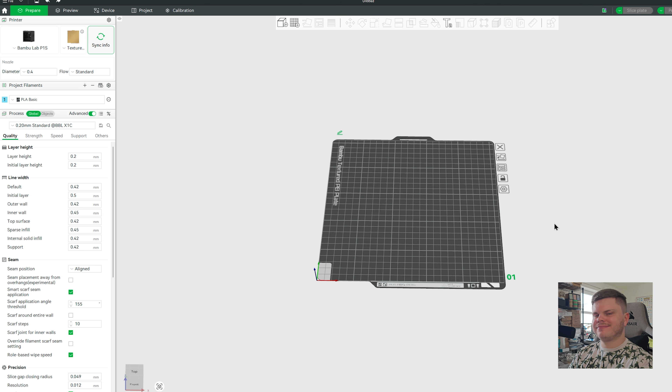Once you're in your slicer, in my case I'm using Bambu Studio, and you've found a model you want to modify. In this case, I've got this cute little egg model, which I actually made myself. But as you can see, it's just a solid model right now, nothing interesting about it. We might want to turn it into a keychain, for example.

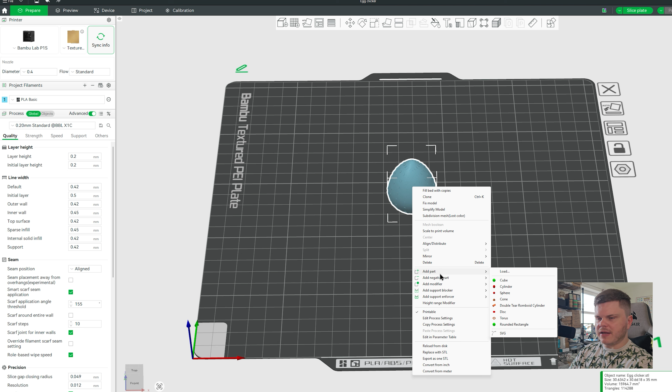So in order to add both positive and negative parts, with the model highlighted, you right click. You can see options here for add parts and negative parts. The same shapes are available, so you can add a cube, a cylinder, or a sphere. However, for this purpose, if you want to add a keychain hole, the best option is a torus shape.

If you add a torus shape as a negative part, you can see it then adds this torus to your build plate. And as you can see in the objects tab, it's here as an additional part to your model. If you click on the whole egg, it highlights everything. If you click on them individually, it highlights the individual parts of the model.

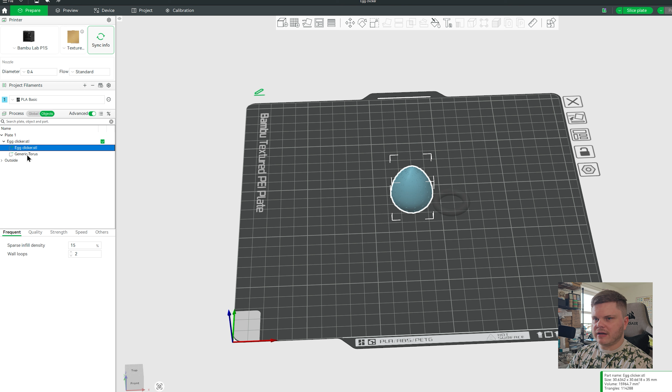Once you've added the part, if you right click on it, you can then center it, which is how I would do it. If you accidentally have the whole thing highlighted and click center, it obviously centers the whole thing. With it centered, you can now move it around if you want. For example, in this case, I want the keychain hole to be at the top.

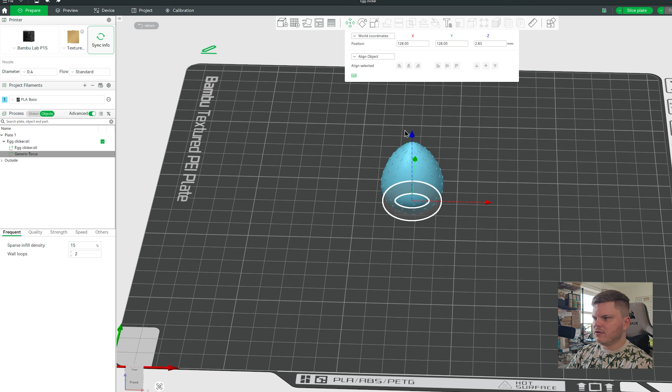Using the move tool, you can move it in the Z direction, and then you can rotate it too. Using the rotate tool, I just want to rotate it so it's facing me like that. Keep moving it until you're happy where it is.

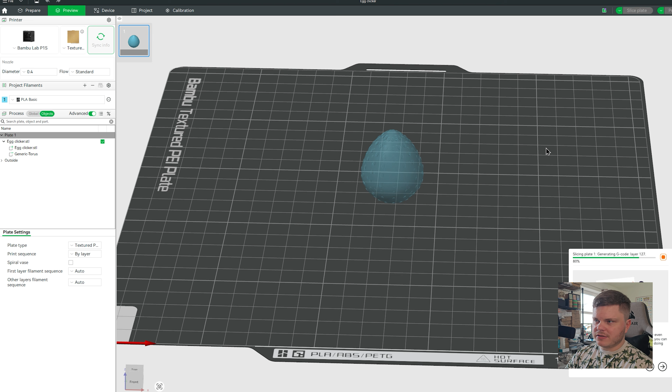The default size is unnecessary. You can scale it down to around 75%, and most keychains will still fit pretty easily. Then you can keep moving it until you're happy with it. So for example, if I slice this plate, you'll now see it has the negative part cut out. You've now successfully turned it into a keychain.

If you prefer hooks rather than holes in your keychains, you can use a positive part instead, so you don't have to delete this and add another one. You can right click on the negative part in the objects tab here, and if you see 'change type' here, you can change it to another part type. So you can change it to a positive part here and then click OK. As you can see, it's now a positive part.

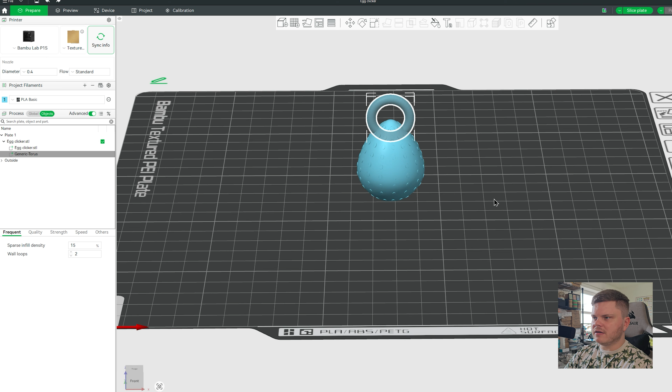Now the size will definitely be overkill for a keychain hook. So if you want to adjust it to 50%, for example, you might want to move it down again, something like that. If you slice that, you can see the positive part. I personally prefer negative parts for keychains, but it's personal preference, obviously.

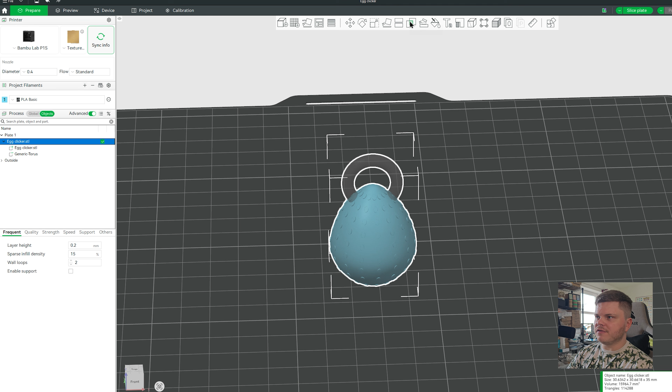If I undo again to turn it back to a negative part, you might be wondering if there's a way to actually combine the parts to make it easier so you don't accidentally move anything around. And there is. When you've got a model that has multiple sub-parts, with the whole model highlighted, you should see this option here for mesh boolean, or boolean, I never know how to say it. If you click on that, you can see you've got these three options.

One is union, which, as the name suggests, combines two parts together. One is intersection, which cuts everything besides the overlapping parts. And the other is subtraction, which subtracts one part from the other. So if we're wanting to make the keychain hole permanent on the model, the mode we'd need is subtraction.

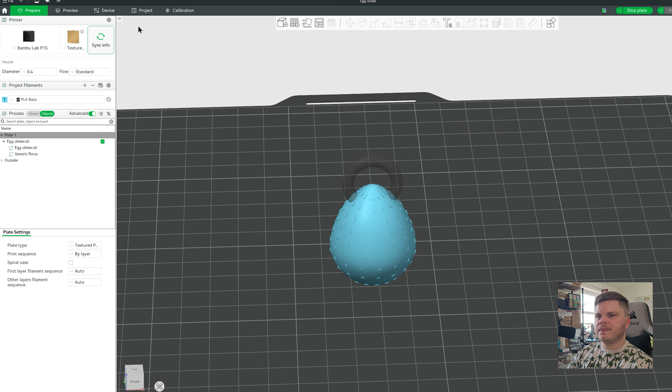However, you can see in this case, because the torus has been inserted as a negative part, an error pops up when I try to execute this boolean operation. So essentially what you need to do is first turn the torus into a positive part. You can only do this subtraction with positive parts, not with negative parts, obviously.

So now when you go into the subtraction operation of mesh boolean, with the main model on the left side and the model you want to subtract on the right side, you click execute, then wait for it to load, and you can now see that the keychain hole has been embedded into the model itself. You can see it without having to slice it. And you can also see in the objects tab, there is no longer two subparts, it's just one model now.

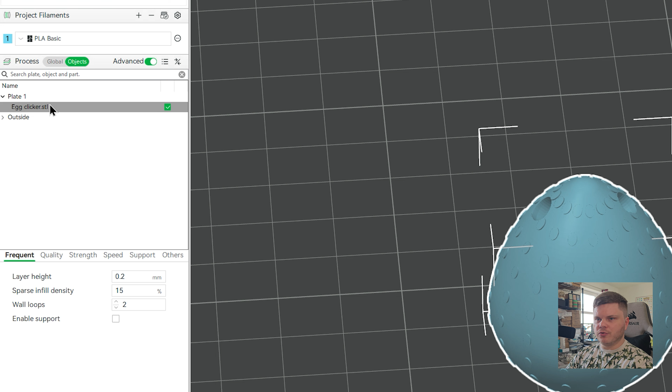This can be useful if you want to export this model as a single STL, if you want to upload it somewhere like MakerWorld so you don't have parts that can be moved around by other people. And obviously if you slice it, you can see the hole is there as expected.

Something else you can do is add another model as a part or a negative part. A great example of this is to turn things into a fidget clicker. For instance, I managed to turn this model into a clicker like this.

For this, you will need an extra model file. On MakerWorld, you can find this model, which I'll leave in the description below. Essentially, this contains the negative parts for the top and bottom part of a clicker to turn your models into a fidget clicker. You'll have to download that first, and then you can add these as negative parts to your model. However, if you've got a model that's in one piece like this, you will first need to cut the model in half.

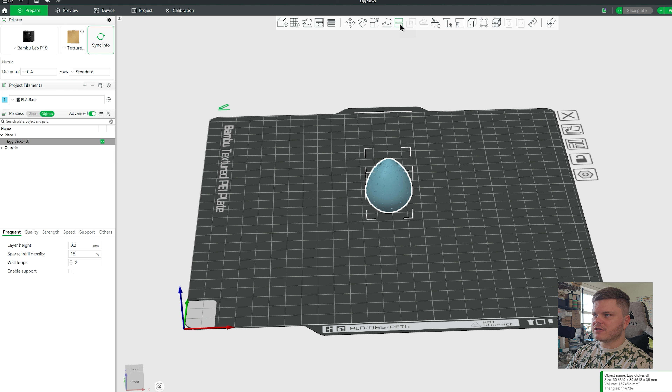In your slicer with the model highlighted, you see this cut tool here, or you can press C on your keyboard, and that brings up the cut here. By default, it cuts directly in the middle. You can move it up and down if you want.

If I move it slightly so it doesn't cut any of the pattern on the edge, you can choose whether you want to keep both objects as well, so you can just keep the top part or just the bottom part, if you want to place the parts on the plane of the cut or not. If you click Perform Cut, you can see it's cut the model in half into A and B.

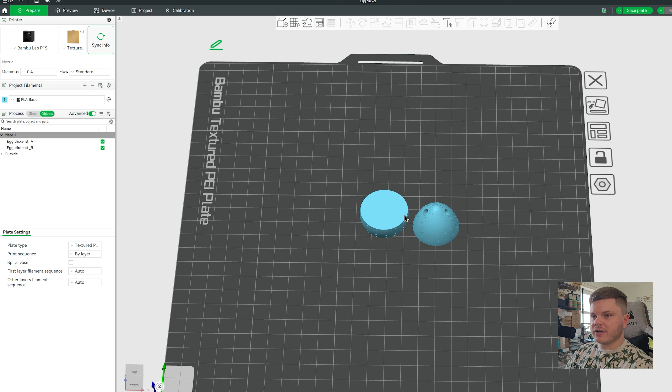With the bottom half selected, you can add the clicker part as a negative part. In this case, I'm going to add the bottom part like this, and then I can center it. Essentially what you want to do is move it until it's just sticking out like that. If I slice it, you can now see the cutout for the bottom part of the clicker.

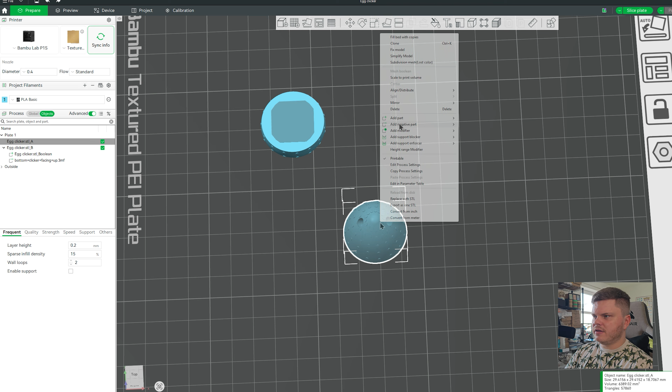If I do the same for the top part, so if I center this first, then load in a negative part. This time it's the top part of the clicker with the little cross cutout, and center that. If they're both centered, you won't need to move this up and down because they'll be exactly equal to the build plate. If I slice that now, you can see it has the cutout of the clicker part.

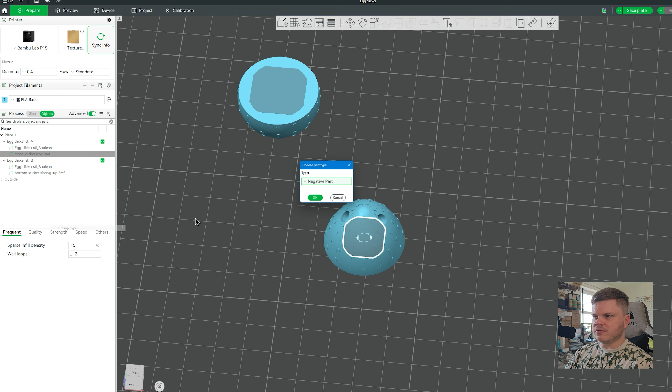As you can see, I might accidentally move one of the parts without taking the negative part with it. So as I showed earlier, this is where you might want to combine the parts. First I have to convert both of them to positive parts instead. Click on Change Type and change it to Part.

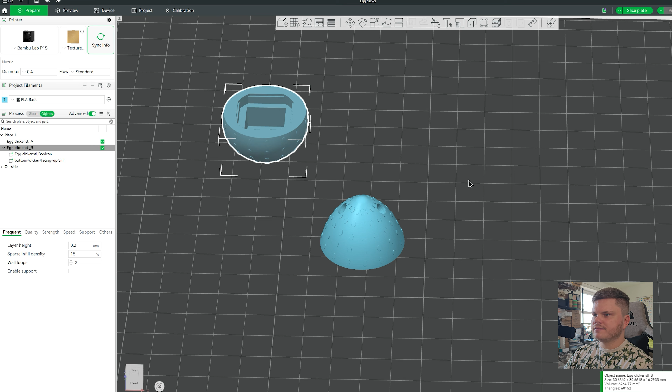Then with the whole of each model selected, go into the Mesh Boolean and the Subtraction tab. Make sure the models are the right side and the right way around. Then Execute. As you can see, the cutout is there permanently now. I'll do the same on the other one. There you go. This way I won't accidentally move anything around like I previously did, so it's just easier, especially when you're exporting or if you want to upload your own models to MakerWorld.

Just to confirm, slice it and just check everything's okay. And it looks good. So this is how you can successfully turn something into both a keychain and a fidget clicker at the same time.

You also might have found other models on MakerWorld which allow you to add negative or positive parts to things. For example, I've seen models to make your own slime fidgets like these ones. I haven't shown that here, but I will leave a link to a model in the description.

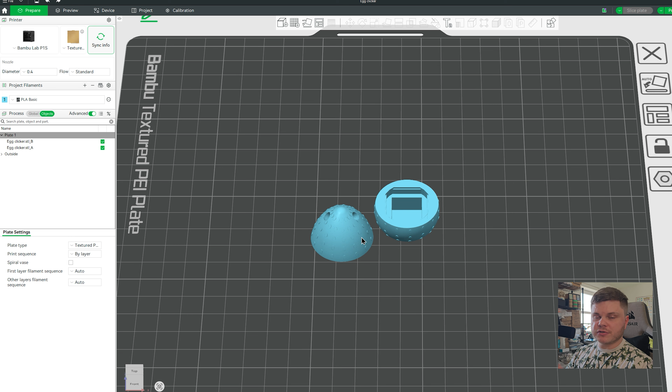I also mentioned earlier that you can turn things into fridge magnets. In this case, you probably wouldn't use this as a fridge magnet, but just to show you, if I center this, the best part you would probably want to add for a fridge magnet is a disc. So you add a disc and then center it.

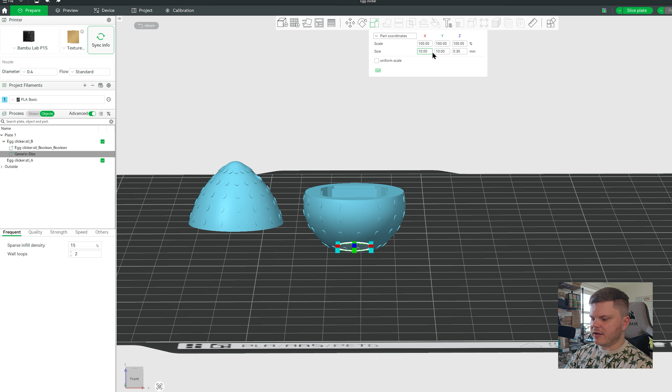Depending on what magnet size you're using, you can scale it. So if you're using an 8x2mm round magnet, for example, if I turn off uniform scale, I set this to 8.1 just to give it a bit of clearance, then set that to 2.1.

You will need to move this now because I scaled it. So move it till it's just sticking out the bottom of the model. If I slice that, I now have a magnet hole at the bottom.

You can add these to your model to make your own fridge magnets too, which I did with this Umbreon fridge magnet. I added this as a negative part in my slicer and then just glued a magnet in, and it works really well.

I actually find these kinds of things like keychain holes and fridge magnets are better to add in your slicer rather than in your modeling software, such as Fusion 360, for example. This is because you can adjust the size of them on the fly, so you can delete and change them if you want, which makes it a lot easier and more customizable instead of having it baked into the model when you export it.

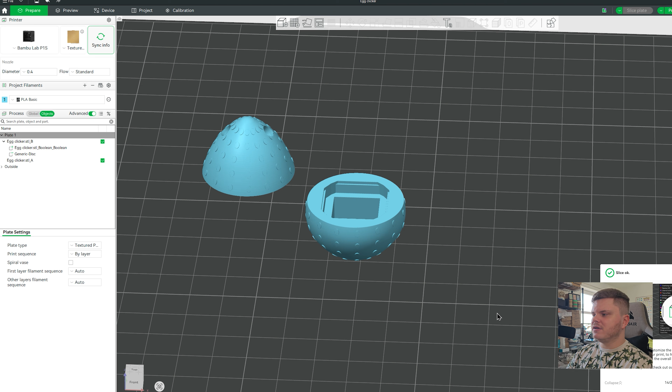So that was how you can use simple positive and negative parts in your slicer to modify models you found online, or even your own models.